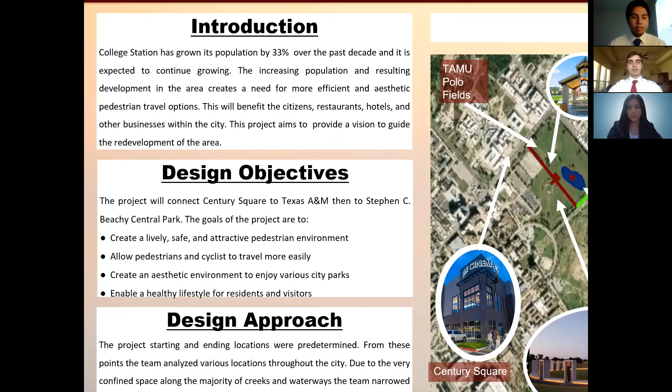Based on our clients' needs, we have already predetermined the starting and ending locations. The project will begin at Century Square and end at Central Park. Due to very confined spaces around the city, including limited creeks and waterways, MLG Consulting has decided it was best to narrow it on bike lane transportation. This will increase connectivity within the city.

We looked over various areas around College Station and focused on a path that contained the most attractions and highest feasibility. It was more efficient to revitalize areas with existing infrastructure rather than constructing entirely new ones.

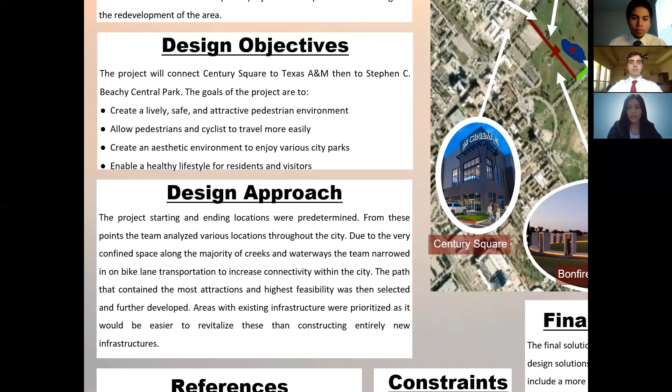Some of the constraints we encountered was the limited space, and this was due to private property. This also led to establishing community support. Since the project will include some construction, the nearby residents might not be too pleased with a project such as this. There was also a lack of waterways in the city of College Station for us to work with.

There has to be a reasonable budget along with the consideration of state and local regulations. Since there is already established businesses and residential homes, there was limited accessibility around the city. We also had to take into consideration any existing university development plans.

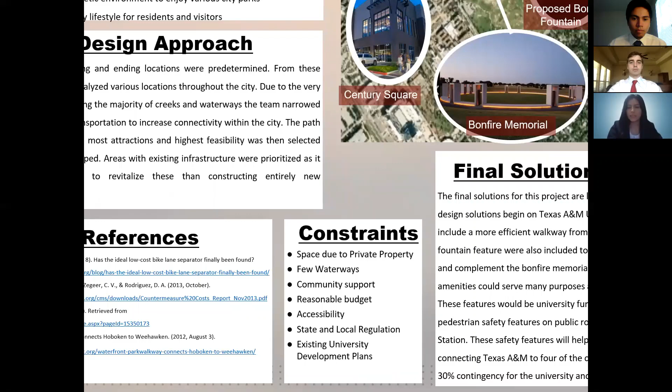As Jessica mentioned, the project begins at Century Square off of University Drive, across from Texas A&M University. An existing crosswalk in front of Century Square will serve as a crossing point to Texas A&M University's polo fields, where we have proposed the redevelopment of a sidewalk and a cart path, among other amenities.

This path will lead pedestrians from Century Square to the highly regarded Bonfire Memorial structure before continuing to main campus. The field surrounding the memorial is used for several sporting activities, but there is plenty of room to incorporate additional attractions without invading on the space used for these activities.

A covered picnic area with amenities has been proposed to provide these athletes, students, and visitors access to drinking water, shade, and a place to gather. To beautify the area and make use of the large space, a pond with a fountain feature has been recommended. Due to the close proximity of the Bonfire Memorial, a fountain design resembling the bonfire construction has been recommended.

From here, the path will continue to an existing path along New Main Drive. This path has a safe crossing at Texas Avenue to Walton Drive, where it will join with the proposed route through College Station. Walton Drive has an existing painted bike lane, but we have proposed fresh paint on this road for the section leading to Puryear Drive.

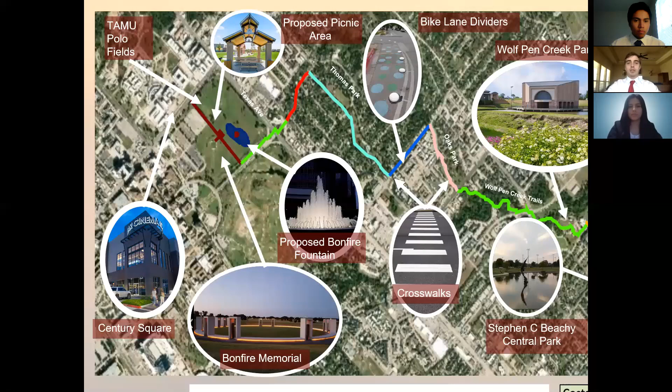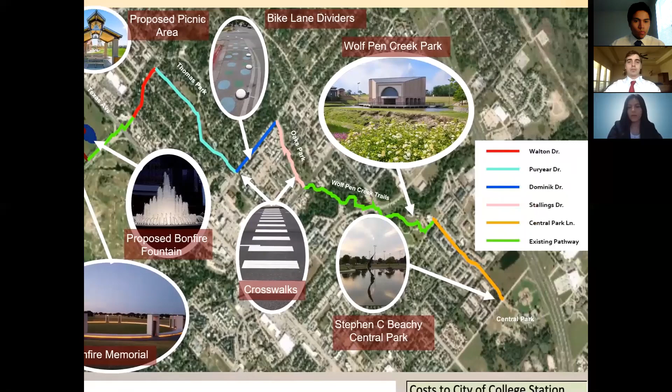From there, down Puryear, a new bike lane has been recommended to the entrance of Thomas Park. Thomas Park is a great location for our path because it already has an existing trail with several amenities, including a pool and picnic tables for cyclists to take a quick break.

Following Thomas Park, the path will intersect between Puryear Drive and Dominik Drive. In this intersection, we plan on implementing a crosswalk. We also believe it is essential to have bike lane dividers around this area. The need for safety measures is greatly needed in parts of the city. This will provide a safety barrier for cyclists from passing automobiles.

The bike lane dividers proposed will consist of circular concrete molds. These are efficient, low cost, easy to install, and visible.

Following Dominik Drive, the path will continue into Stallings Drive, where Oaks Park is located. Oaks Park already has many existing amenities, such as a covered basketball court and picnic area, as well as a frisbee golf course. But it ends at Harvey, which is a busy road.

In order to make the crossing to Wolf Pen Creek safer, we propose building a crosswalk. This will make drivers more aware of pedestrians and ensure a safe crossing. We made sure to include Wolf Pen Creek because it already has many paved paths, a safe intersection, and is used extensively by the community throughout the year.

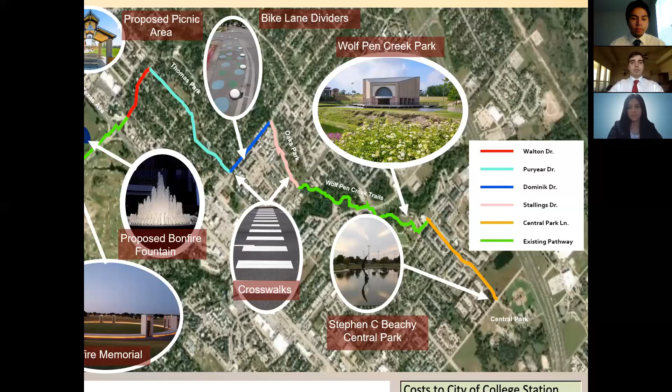Wolf Pen Creek connects with Central Park Lane, which would receive the same bike lane dividers and ends directly at Central Park. To analyze the feasibility of this project, we divided it into two phases.

The first phase consists of all construction on Texas A&M's private property. This phase will be funded by the university and through donations from the community and former students.

Texas A&M is rich with tradition and meaningful symbolism exemplified in things such as the Aggie Ring, the War Hymn, and the Bonfire Memorial. Construction of other attractions near the memorial could gain criticism if it is perceived as a distraction from the memorial. To counteract this, we have built symbolism into the fountain design to make it an extension of the memorial.

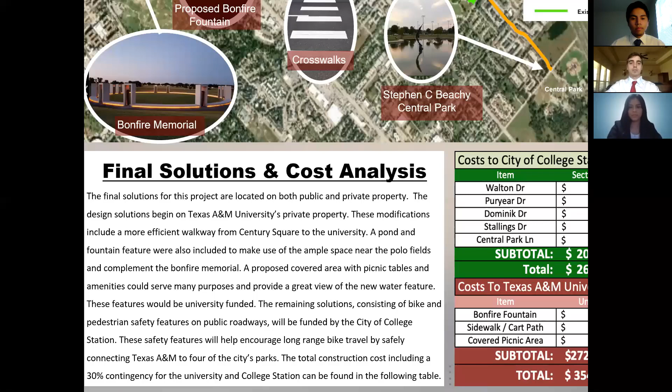The path will also provide safe and easy access for students and visitors to the popular new Century Square. This will allow more people to observe the many details in the Bonfire Memorial that would otherwise go unnoticed. The total cost comes out to about $350,000.

To allow time to raise funds and increase the meaning of the construction, the date for completion of the fountain has been recommended on November 18th, 2029, which is the 30th anniversary of the tragedy.

The second phase, containing the remaining bike lane modifications throughout College Station, will be funded by the city. The total cost of $26,000 is relatively low compared to the city's annual budget for park projects and could be easily implemented within a few months.

While we believe these additions will improve the safety and increase access to the city's amenities to bikers, the city will most likely need to reference a cost-benefit analysis to approve these additions.

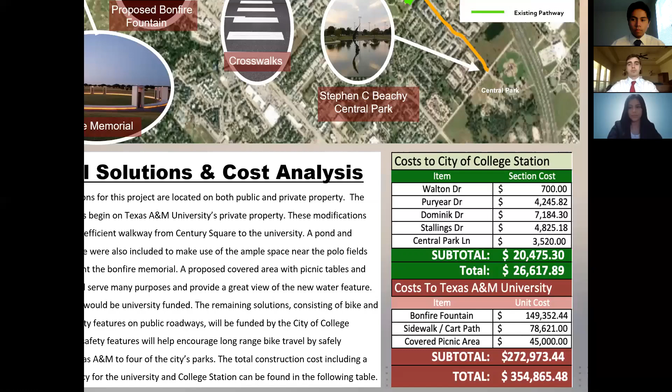And that brings us to the end. MLG Consulting has focused on revitalization of College Station through the connectivity of various parks, including bike lanes. We believe the path chosen will be the most successful for the city. We appreciate your time and thank you for watching.